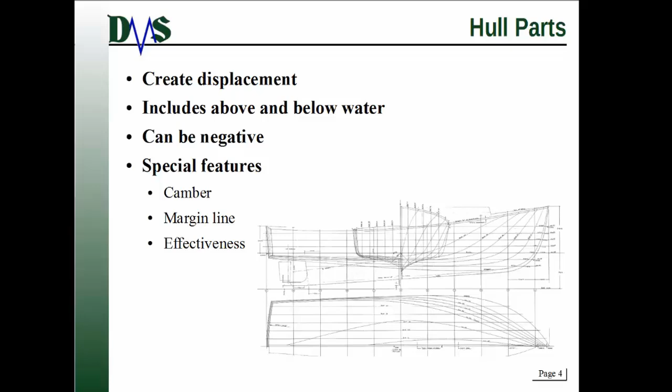The next part I want to talk about are tank parts. Tank parts are probably the one element you will model the most in GHS, and that's because ships have a lot of tanks in them usually. There's a lot of fluids that they have to hold. And that's what tank parts do. They hold the weight of fluids.

And that's kind of important because number one, tanks, their fluids are adjustable. As a ship travels along, it burns fuel, so the level of fluid in its fuel tanks reduces. You can do that in GHS, as you can adjust how much fuel is in the tank.

And also, the actual center of gravity of those tanks will actually shift with the vessel's orientation. So if a vessel trims by bow down, the tank contents will shift forward. Their center of gravity shifts forward. That has serious implications for stability.

And that also leads to a few special features for tank parts. Number one is permeability. So you can adjust the permeability of the tank part. Second feature is contents of the tank. So this is one of those elements where it doesn't always have to be the same fluid. You can actually say that the fluid is fuel and say what the density of fuel is, or say it's heavy fuel oil and give it that kind of property.

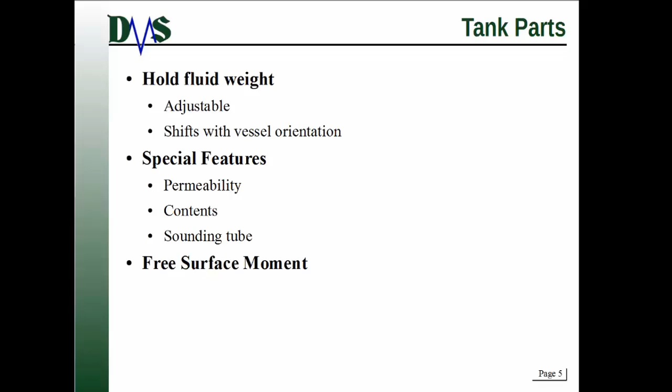But first, I want to talk a little bit more about the contents of a tank. There are two important parts to a content in a tank. First off, the fluid has a name to describe what kind of a thing it is. This is very convenient for you. And then the second thing is that the fluid has a density. Now, here's one of the key things to remember. Densities of fluids in GHS are always set as the specific gravity of the fluid relative to fresh water.

Now, when you're working in Rhino, you can set that information in Rhino, but sometimes you don't have to, because GHS also has built-in tank contents for common types of fluids. So for common things like fuel oil or seawater, you don't have to define the actual type of content. You can just tell its name, and GHS will automatically look up the density.

So as an example here, this is the command of how you would actually define the contents of a tank. The keyword is contents, that's your command. Then we have the description, so that's whatever name you want it to be, a comma, and the specific gravity. So for example, if I wanted to define a new fluid of LNG, it's contents, LNG, comma, and specific gravity. Now, if I was just using fuel oil, I could type just contents FO, because the FO name is a built-in GHS keyword, and it automatically knows to look up the density for fuel oil.

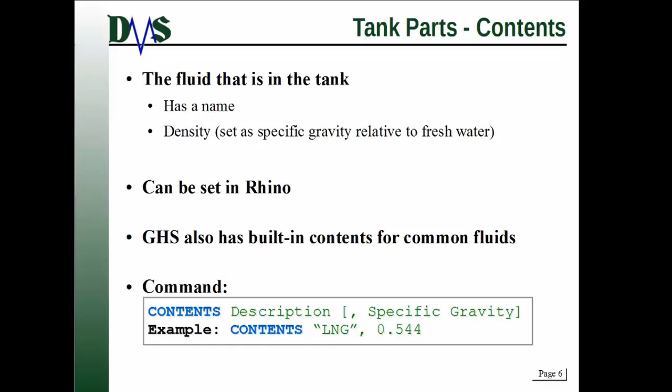Okay, let's talk a little bit more about sounding tubes now. As I said before, a sounding tube can have multiple segments. It can be just a straight line, or it can lead multiple paths. The way you do this in Rhino is you actually create a line in Rhino, so a polyline or a curve, one of those line objects. And then you'll assign that line to a tank. I'll tell you more about that later.

What's really important is that it's useful when you're creating tank capacity tables, because those tables are organized by the sounding on that sounding tube, either by a sounding level or an ullage level. And so when you define this sounding tube, GHS recognizes that length along the tube is your sounding level, which is not necessarily vertical position in the tank. Sometimes it might follow the shape of the shell of the hull, for example.

Now, if you're going to define it in GHS using commands, the keyword is tube, and then it's a three-part coordinate system: length coordinate, transverse coordinate, vertical coordinate. And you can keep defining those coordinates. It's just a list of coordinate positions, and here's the important thing to remember. The bottom of the tube is the first coordinate point, and you go from bottom to top as you define more points. You can use a maximum of 255 points, which is quite a lot. I don't think anyone has ever needed that many.

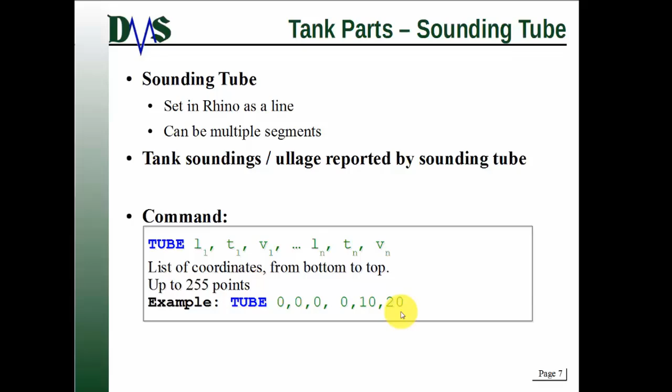Okay, and again, saving the best for last: tank free surface moment. Free surface moment is quite important, and GHS actually gives you several options for how to calculate it. This is something that you set at analysis time. So when you're building your model in GHS and thinking, how do I set the free surface moment for my tank? Don't worry about that. You don't set the free surface moment when you're building the model. You do it when you're actually using the model in analysis. So we'll come back to that in later lessons.

Now, the way that GHS natively calculates free surface moment by default is it holds the volume of the tank constant. So if you've said you've got 500 cubic meters of fuel in the tank, it knows it has to keep it at 500 cubic meters. And then it's going to calculate the heel and trim of the vessel and allow the contents to shift. The liquid surface will adjust its orientation, and that changes the center of gravity of the tank. GHS recognizes that shift in center of gravity.

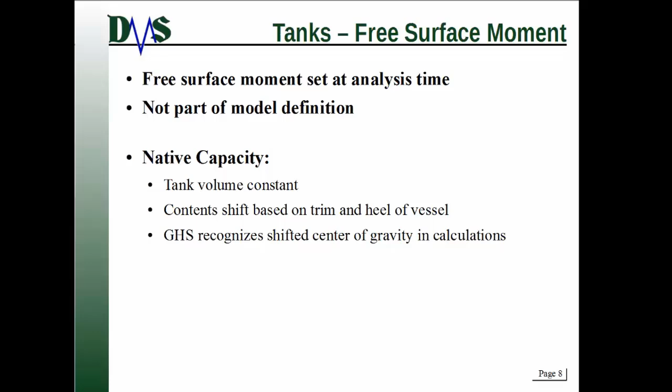Okay, we're done with tank parts. Let's move on to the concept of sail parts. Sail parts are a handy little tool to have. They do not have any displacement, they do not have any weight, they do not contain any fluids. They are just a wind area.

So this is just for when you're looking at stability calculations for things like wind heeling moment, and you want to include elements like, well, if you're a sailboat, your sails, or if you want to include things like a superstructure. A superstructure is something that doesn't really have any displacement to it. The structure would never stand up to that kind of pressure, and it doesn't really contain any tank parts either. So you give it a sail part, and the sail parts just catch the wind.

They only work in the transverse direction, and here's a real catch: if you stack sail parts in front of each other, GHS will not automatically assume that there's wind shadowing happening. If you have one part in front of another, it's not going to account for the area deduction. So if you've got, for example, a part with 1 square meter of area and another part in front of it with 2 square meters of area, GHS still thinks your total wind area is 3 square meters. It just adds the two together.

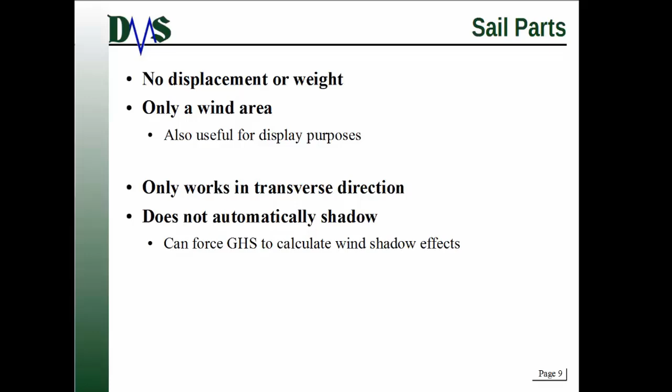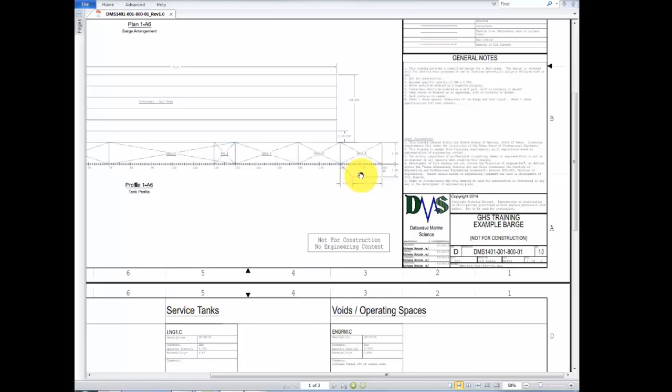Okay, so we've covered quite a bit of information about the various parts, and now this is really going to be a case of learning by doing. So let's talk about homework number 231. In that homework, you're going to find a drawing of an example hull, this barge, in fact. This is the drawing. So if I zoom out, give you a bit of an overview here. And there's the plan view and the profile view. It's a very simple drawing, a very simple barge.

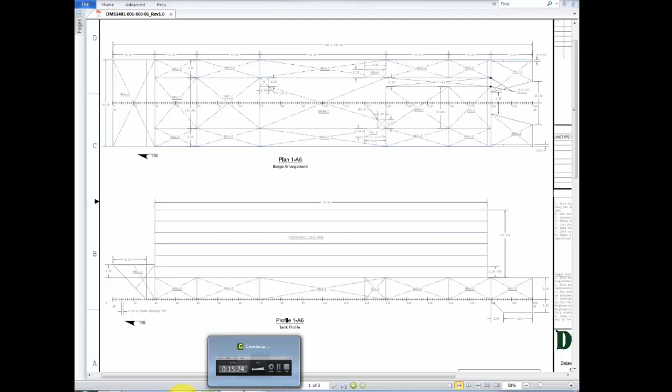This is not intended to be for construction. I'll say that very clearly. This is not for construction. It's just meant to be something for you to work with. So what do I want you to do first? First, create the hull geometry in Rhino. So you're going to create just the hull, and then attach that geometry for a GHS object. So use the command attach GHS data. And once you've done that, you'll create the hull as a single part in that pop-up menu.

So you're going to have the hull part, and then you're also going to create the notch as a negative displacement part. So if I can go back to the drawing here, notice we have a notch here in the aft end of the hull. This is an ATB barge, and so this is where the tug would come in. So I don't want you to model it with a section. I want you to model it with this whole part of the hull as one thing, and then add in the notch as a second displacer part that has a negative displacement. And once that's all done, you can actually do a file save as in Rhino and save it as a GHS file, open it in GHS, and check your work.

Once that's done, we're going to roll on to homework number 232. Now, if you had any problems with homework 231, the solution is also provided in there. And we're going to use that as the basis to now work with homework 232. So I want you to take that hull geometry that you've made and add in all of the tank parts.

Now, a couple catches. First off, the engine room has 2 tanks in it. So if we look right here, this is our engine room, and this is common enough at times. Many barges have auxiliary engines for some form of power. And notice the engine room has 2 tanks inside of it, a lube oil tank and a hydraulic oil tank.

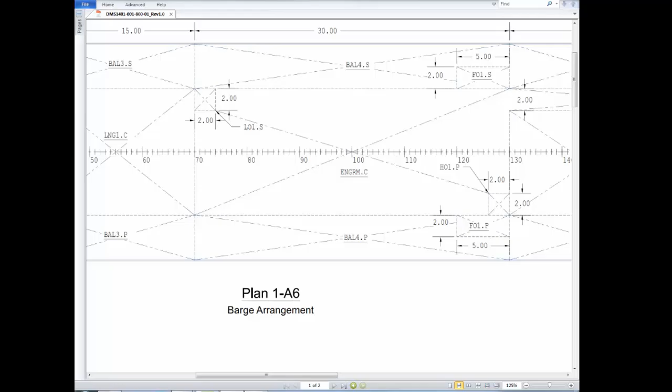So the way I want you to model those is first create the entire engine room, and then deduct those 2 tanks from the engine room. So you're going to create those 2 little tanks as their own little things, and then you're going to deduct them from the engine room. You'll use that as a negative volume.

If you can, also try to define symmetrical tank parts from the same shape. This is all being done in Rhino. You can still use Rhino for all of this. And finally, leave the contents and all the permeability for your tanks set at their defaults. We're not going to worry about that yet. And of course, there's a solution provided for this. Once you've got all of that defined in Rhino, you can save as a GHS file and open it in GHS to check your work.

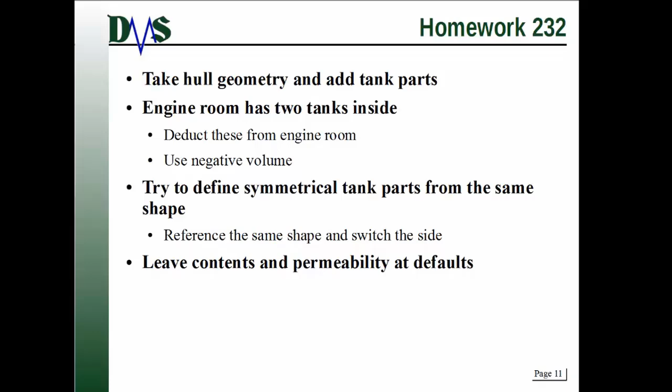Once that's done, move on to homework number 233. Now, I know it's a lot of homework, but it's really the best way you're going to learn about the different hull parts, tank parts, and sail parts, and all the things they can do. So now we're going to go in and customize those tanks. I would like you to assign the specific permeability to each tank and the specific contents to each tank. And there's even 2 custom contents that you're going to use.

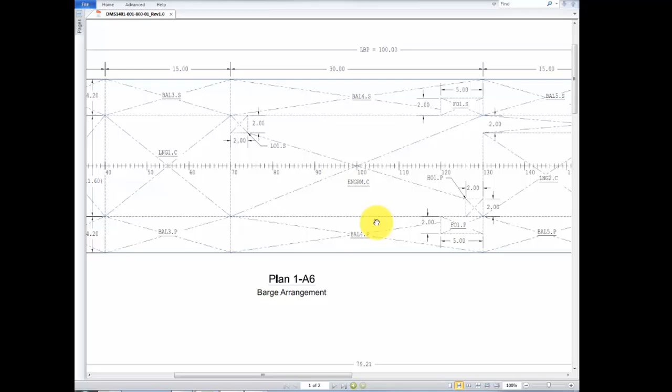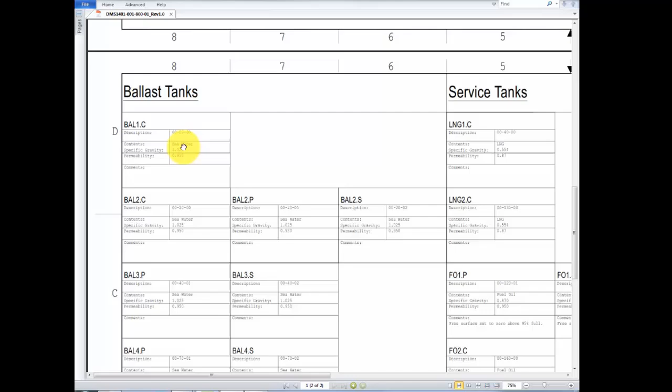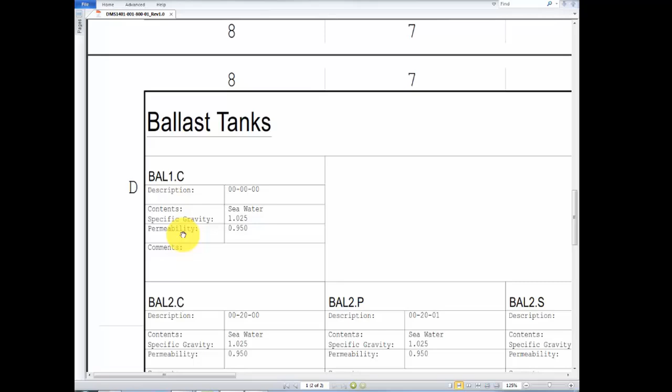One is LNG, which is liquid natural gas, and another one is the engine room that has a tank content of air. Now, where can you find all this information? If you go back to this plan of the barge, go to sheet number 2. So sheet number 2 lists all the information that you will need for each one of these tanks. So notice for every tank, we've specified the permeability of the tank and the contents of the tank, what their names are, and the specific gravity of those contents. So all of that information is there for you to work with. And you'll notice that all of the tank names have already been set up as GHS part names.

And then finally, once you've gone through and assigned all of those tank permeabilities and tank contents, if you're still up for it, define sounding tubes for each tank. So again, the way you do that is first you create the lines in Rhino. They're just straight lines. Then you go back into your attach GHS command, and for each tank, you're going to press that set tube button. Set tube. And then that will allow you to select the line that you want. You just click on the line and it's now assigned as the sounding tube for that tank. And of course the solution is provided as well for homework 233.

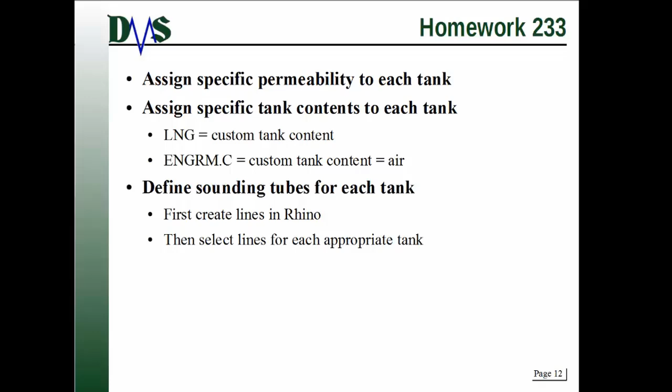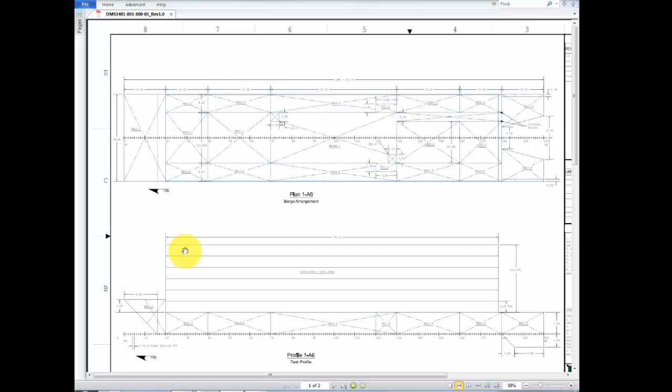Finally, homework 234. We're going to build on the last homework again, and what you're going to do this time is add in the sail area of the containers. So if I go back to our drawing, notice here in profile there are all these containers on the top of the barge, and they're actually stacked in rows. You've got 1, 2, 3, 4, 5, 6 rows of containers. These are standard ISO containers. So what I would like you to do is create one sail part for each row of containers and have them stretch across the full width of the deck plus the full length of the hull based on the dimensions you see in that drawing.

The reason you're doing one part for each row of containers is later on when you get to stability analysis, it's useful to be able to turn off one row or another if you're not sure how many containers the stability of the ship can take. And then you're also going to add in the skegs to the bottom as a non-displacement part. These are free flooding skegs.

Now, how do you do that? Well, again, you're going to first create the geometry of the skegs in Rhino, and then you're going to attach them as a hull part. But here's the key part. Once you've attached it, change the properties, set the effectiveness of the skeg to 0. Effectiveness is the key word. And for all of this modeling, use the actual dimensions from that drawing.